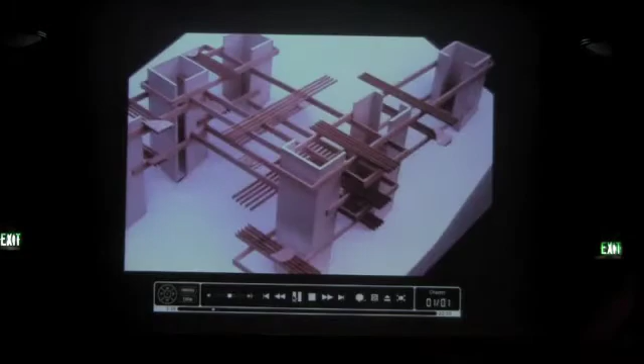Actually, I purchased the site in the early 60s, about '63, and I was aware that it was on the springs, with a great amount of water flow. At the time, I was very much involved with developing a modular idea using core units connected with laminated beams. So I decided it would probably work here because I could touch down with a series of concrete tower units. That created a house of 4,000 square feet on a 600 square foot piece of land.

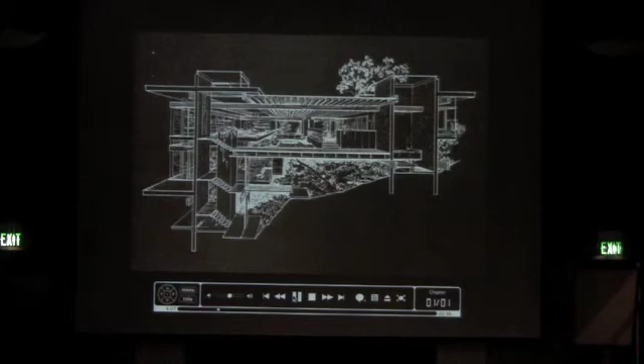I wanted to keep the house parallel to the street because that's the way the neighborhood developed. My lot was a transition lot between a flat level above and a flat level below, and the land was actually coming at 45 degrees to the house. So I ended up with a large number of levels, about 7 levels in the house.

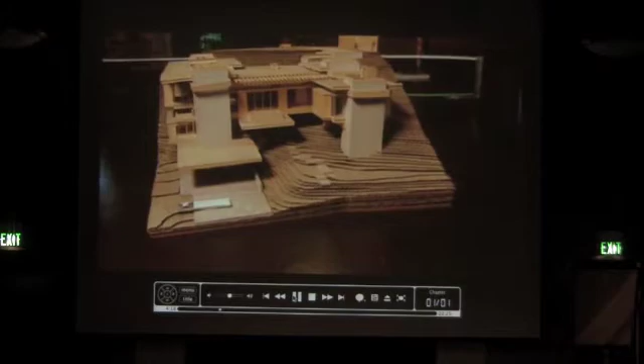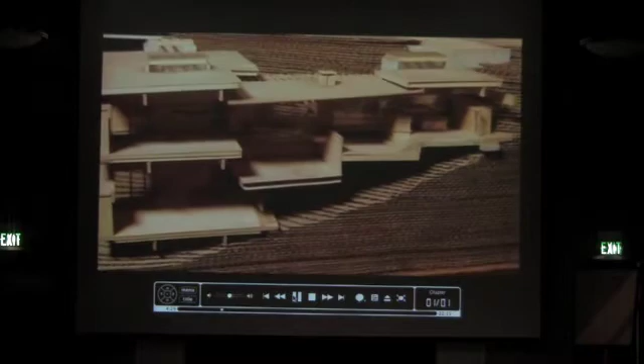If we take it apart, we can see the section. You can see the studio where we're standing now, lower living room, dining room, kitchen, upper living room. Plan-wise, the whole thing was rather simple. I thought of this whole area as a family space, from the kitchen to the studio. In this case, I have eye contact from the highest point in the house to the lowest point.

There were 6 towers that held up the house. We can see one over there that contains a stairway. Three of them contain bathrooms.

And the kitchen, I use it as a nook area, and the master bedroom has a fireplace. Each of these had their purpose as well as support, and they were 8 by 12 dimensions that could accommodate most activities of bathrooms, stairways, kitchens, and so forth.

The rest of the house bridges between these concrete columns. All the tower units are skylit, as we see here. At the same time, because I have a clerestory between those two rooms, I get light into the kitchen space as well as into the bathroom.

And there's usually a line, as you look around here, carried through at the lower level to establish the point of door heights. And above that, there's always glass, and that glass then frees the upper roof.

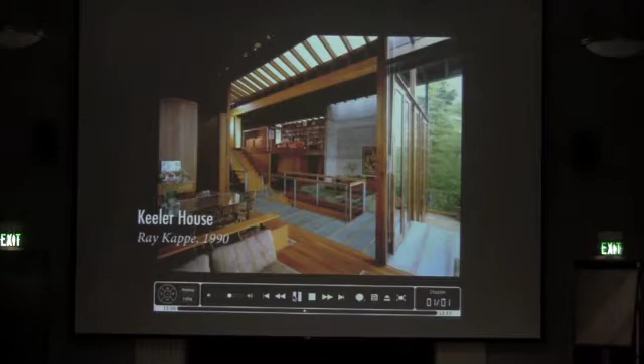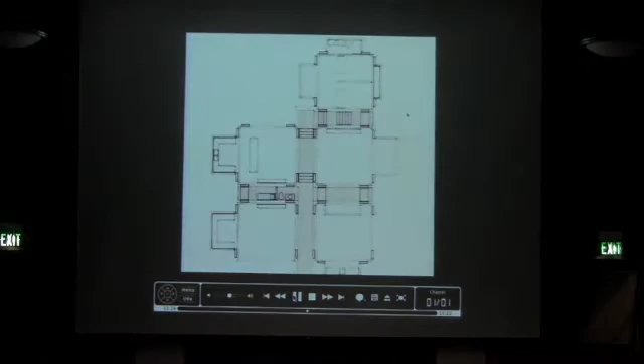As I started to talk to him, I discovered that in fact he'd been doing prefabricated architecture for decades. He'd actually worked on some designs for modular buildings, and he's been doing energy efficient design for decades.

So over there's some of the same Legos I had as a kid. I played with these and still do. This very much inspired my thinking about prefabrication, because Legos are a bunch of pre-created pieces, modules that you can combine to do different things. What we're trying to do with the homes is componentize, segmentize, create a consistent attachment system.

So they're absolutely analogies, but they aren't total analogies. Legos are pretty lightweight, these weigh 50,000 pounds, and those snap together, these require welding. We don't do those colors, but yeah, we have others.

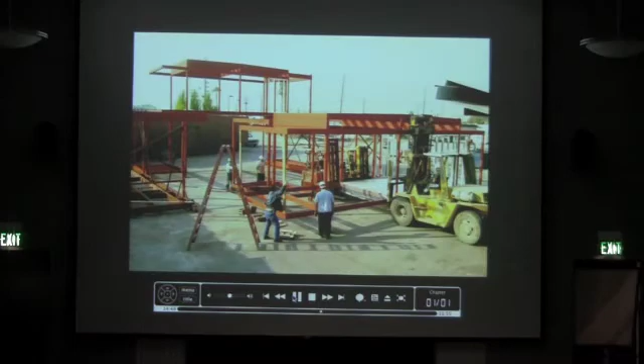So there's a difference between prefab and a site-built home. Site-built, you're going to do the foundation, then frame it, then put up the walls and do the electrical and plumbing and finish it out. Prefab, you're working on the foundation, and somewhere off-site, you're working on the house components. When you have the foundation, you can hopefully come to site and finish things out much quicker.

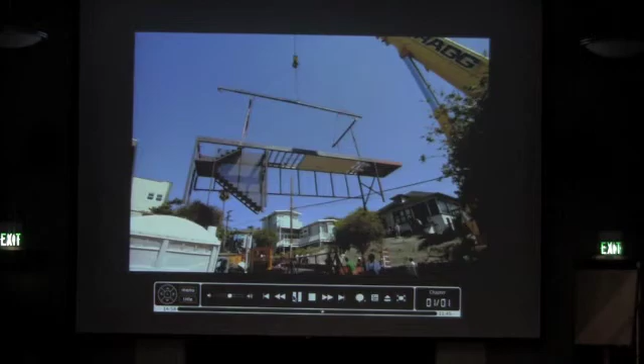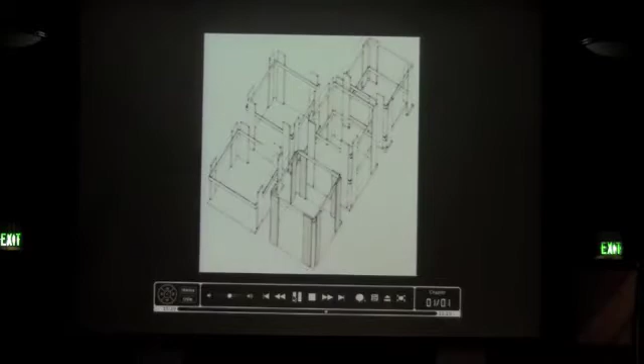I think most people think of a module as a box. When you open up a piece of the module, it takes away from the sense that you're in a box. And so when you're in this house, which was one of my greatest desires, was to make it a different kind of experience, or an experience that one might get from a custom house, rather than the feeling of being a series of closed elements.

We used a see-through fireplace so that the room above, which was meant to be more of a cozy sitting area, and the dining room, both could partake of the fireplace. It also gave the space a continuous flow. And at this point, we're in the middle of the house, it just allows the whole space to really come alive. You get kind of the whole feeling that the house is really alive.

A clear requirement was this ability for the home to adapt to people's changing lifestyle needs in certain ways. So we came up with a few things that are important. One is movable walls. All the bedrooms have these walls that open and close. There's a sliding system, and there's also this accordion system.

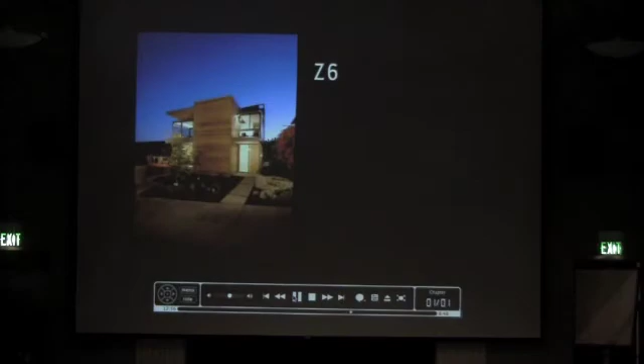We developed our own set of goals. We call them Z6. We're trying to make our homes as much as possible zero energy, zero water, zero emissions, zero carbon, zero waste, and zero ignorance.

So when we say zero energy, there are two parts to that problem. One, minimize energy demand, so make things as energy efficient as possible. And then two, supply what we need from renewable resources.

So number one, reducing demand. It's very tight and harder to do here because we do have a lot of glass. The glass we use is double pane and low-E. It's pretty energy efficient for glass.

We use polycarbonate, which has twice the thermal properties of double pane glass, so it's much more efficient as an insulator. It's really a plastic material of several layers - a layer of plastic, air - and that's why it becomes a more efficient piece of material. When it's built up, it's very strong, almost like a hard piece.

We use a very high R factor, which is a level of insulation in the walls. And by the way, it's made of denim, blue jeans.

All of the downlights are LEDs. LEDs use a tenth of the power of incandescent. Super energy and water efficient Bosch appliances.

Cork floors. Cork is a very fast growing material - you don't have to fell the tree to harvest it.

Very energy efficient radiant heating system, so it's hot water under the concrete and then the floor above, and that's preheated by solar tubes on the roof. That reduces demand, and then we have photovoltaics on the roof, which produce probably 80 to 85% of the electricity here.

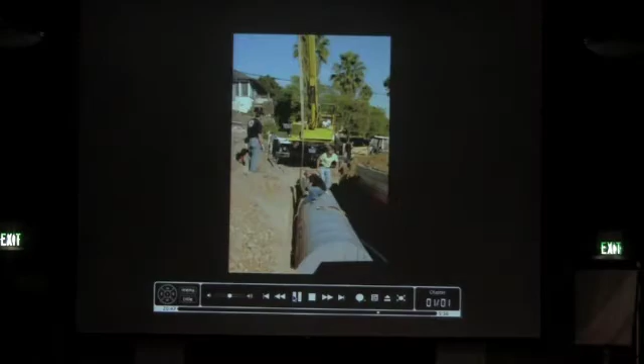Zero waste, sort of the same idea - how much waste is involved in creating, producing, transporting material. All the energy materials are recycled or reclaimed. Steel is the most recycled building material there is. Cedar, and the cedar outside, is what's called FSC certified, forest stewardship certified. The concrete here is mixed with fly ash, so it's a more recycled building material.

I, of course, drive the Prius, and the Prius has a great system that shows you in real time what your gas mileage is. Any Prius owner will tell you that at the beginning you just want to get as much as possible, because any system of feedback can be improved.

So we worked with a company to develop a system like that for homes. It shows you in real time how much electricity, water, and gas you're using, to inspire you and help you - whether or not you care - to be more responsible about your resource use in that home.

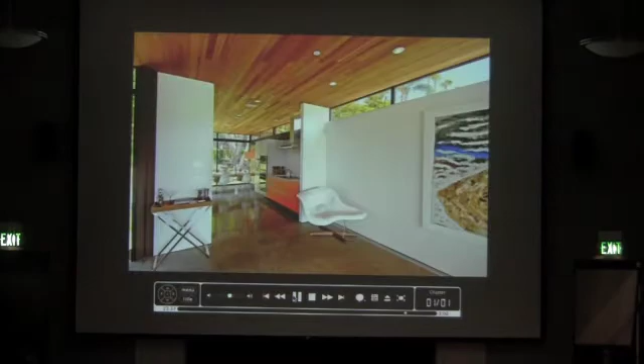At this point in time, we tried to standardize the modules more than we had in the first one. This is made out of only one type of module, and they're 12 feet wide, 12 feet high, but varying lengths—one module wide, 2, 3, 4 modules wide.

When modules are delivered, they're craned up into this base. They try to bring the modules as tight together as they can.

If you just look at this floor in a very simple way, what's demonstrated comes closer to the ideas of the case study period in the early 50s, where the goal of some, at least, Pierre Koenig was to get a high repetitive steel system that would work. This demonstrates a similar character and quality, but using modules instead of parts.

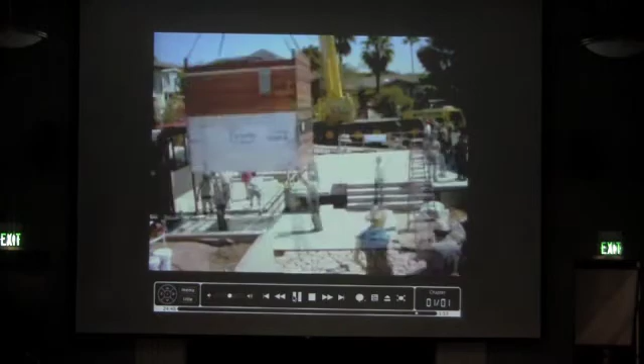What we're trying to do is get these so complete that once the 2-day installation takes place, there's very little time spent disturbing the neighborhood with construction, trucks, and all that kind of thing.

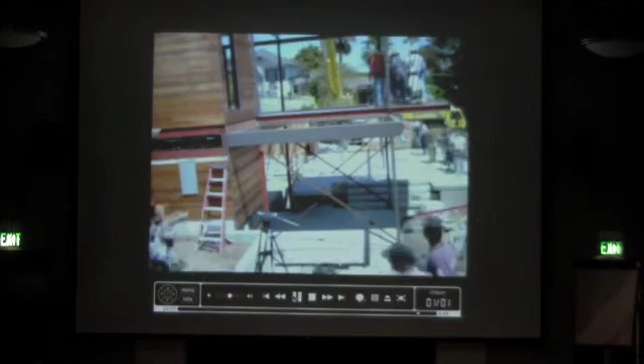The first one we did took 12 months—so permit to move-in took about a year later. Install took 8.5 hours, and it probably took 3 months or so to finish after install. The wired home took about 6 months from permit to mostly complete, so that's faster.

I think most people who want homes want nice homes. I think most people who want modern homes want nice homes. And I think many people who think of modern homes think that they're not nice. Ray is just one of the best that's ever been at creating more modern spaces.

See if this works right now. I cut her off too soon. Help. Wait, I see what happened. I get the PowerPoint thing—if we just let that go, that should run out. Well, I'll start over again. You said hit the... is this the film or the PowerPoint? There you go. Well, now let's start with one. Okay, and then probably get close to the mic. Yeah, I will.

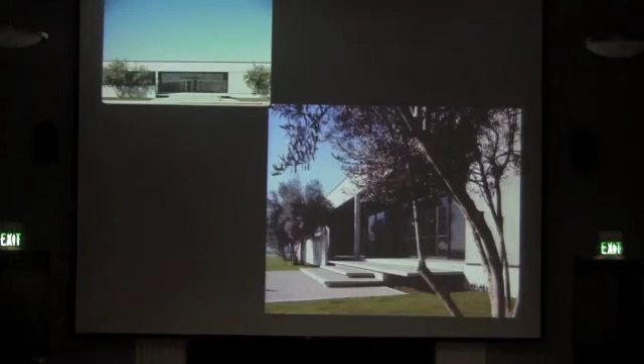Some of the early commercial work we did was like so. Industrial buildings were like this, all tilt-ups and precast concrete. I also did some developer apartments at that time—just to give you an idea, from 1964 to now, in those days these were built for $9 a square foot.

The industrial building that you saw just before was $4 a square foot. So the developers here said, well, we'll give you an extra 50 cents. You can get $9.50. You got a more difficult site, and maybe you can give us a more interesting building.

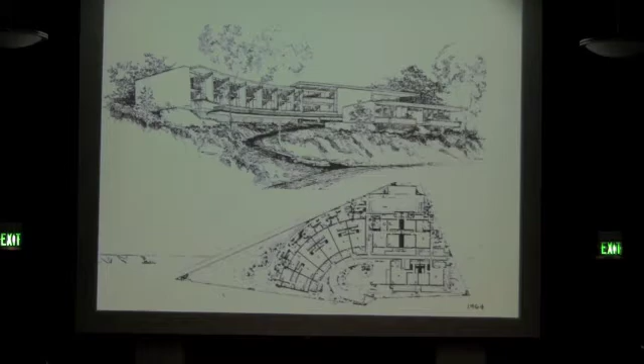And so in this case, the shape of the building really just follows the driveway that goes up there, and we had front and back patios and got quite a bit out of it, including a double height living room space, and quite a different building type than they did at that time, totally.

It was about this time, about 12 years into my practice, and I just finished this apartment building with about 24 units, and I was to have the opportunity to build on this next site, so I was thinking about how I would do it, because there were certain things I was dissatisfied with in the building process.

At the same time, we had done a land planning study for the city of Sierra Madre. My partners, my future partners and I at that time were doing advocacy work, and we had developed a publication on land planning in the hillside. Sierra Madre got word of it and wanted us to do this study for them.

In the process, they also asked us to make some models of how the houses would work on this hillside, different from the normal cut and pad. Most of the little houses that we did to show them in model were bridge houses, not so dissimilar from my own. That was the point in time when I began to think about modular housing.

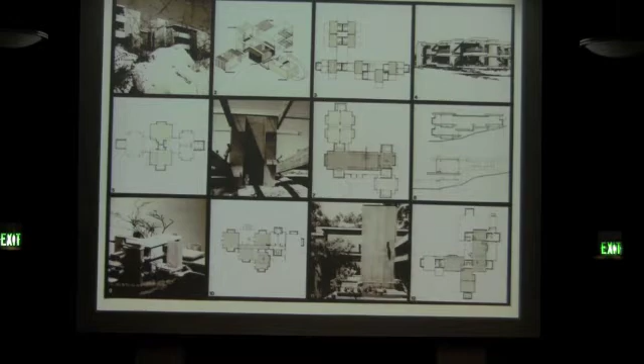And then this house is there, and then there was a 7,000 square foot house here. I'll just run through what those look like - there's maybe a better blow-up that you can see better of the modular system.

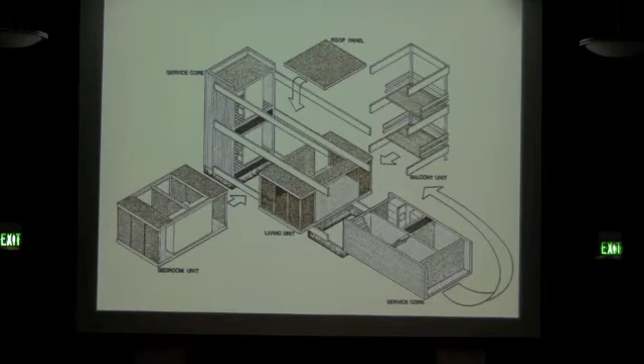One thing that, besides the system itself, is what I liked is that I could really maneuver around trees very well with it, and still I had a lot of bridging and long spans, so it worked well that way.

This little house was the first kind of prototype, and what was interesting here was that the owner bought all of the lumber from a restaurant that was being taken down, which had laminated beams and a bunch of 2x4s or 2x6s and so forth lumber. We incorporated all that lumber into this house, making it work with the same kind of my general system.

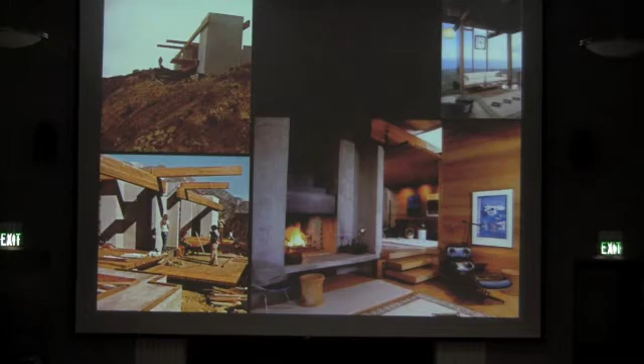This you've seen before is the support system for my house, and you saw enough of that in the film, but this was the larger house using the same system.

The nice part about these is that when the soil conditions were not good, I could concentrate these supports that take all the seismic and all the vertical loads, and also touch down on a very minimum area of the land. And you see the same kind of shadow play through the house, which I always find is pretty wonderful.

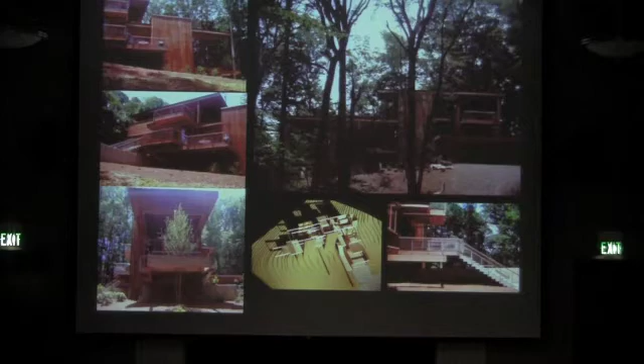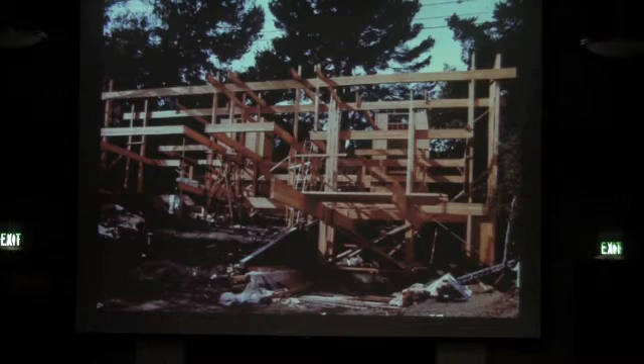In a later house, still using the same kind of system. One in North Carolina, still with the same system. I was always interested in construction process, construction systems, and structure. Some people don't really care much about structure anymore, but I still find it an important element in architecture. And the process by which a building is made, I think, is very important.

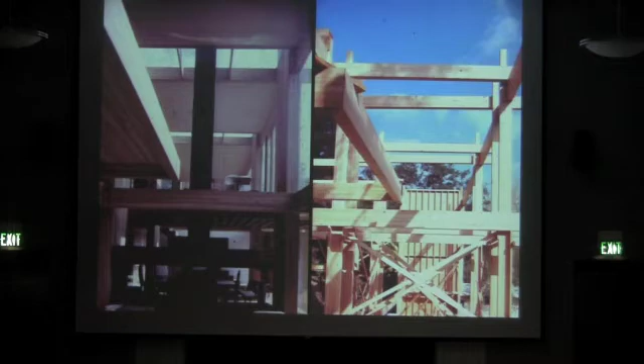I was one of the first people, I think, who incorporated in housing in LA the use of cranes. It's fairly typical in Europe, but it wasn't very typical here at all. This is a house that was a hybrid. All the beams, all laminated beams and laminated posts were pre-cut, pre-drilled, and this was erected in one day using cranes. So it was similar to a steel system in a way, where you can crane everything in, get it in place, then come back and infill later, tighten it up and so forth. Here you see the structure just on the right, and on the left you see it infilled with laminated ceilings and laminated floors as well.

Another system that I was interested in doing - we had this land up in Beverly Glen, and we had hoped to do a little planned community out of it, but they wouldn't let us do it, so we had to stay with these very tight, small sites. I used a repetitive system, three here, three there, and then added these components that could be used for both view, privacy, and sun insulation. I'll talk about sun insulation a little more later when I talk about energy issues.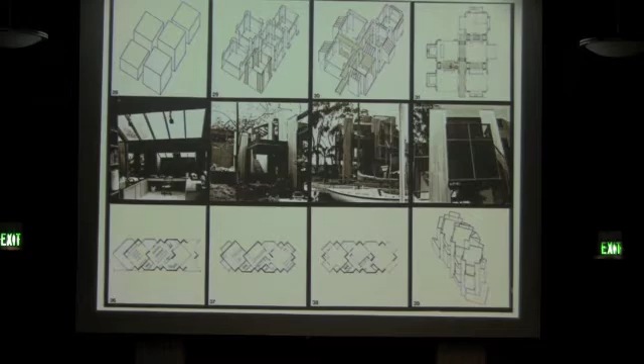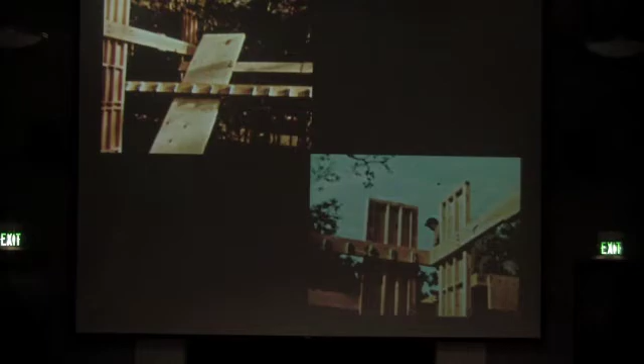So in this case, the carpenter built all of these panels, attached the beams and the joist hangers, and again we craned these up in a day, and then he infilled, and the house looked like so.

And the one at the beach, at the canals, looked like this. I want you to look at the way I used a sunscreen system forward and clear glass behind - we were trying to protect against heat gain in this case.

This was now in 1975. We're moving not too fast, but in 1975, California instituted its prescriptive code on energy - Title 24 is what it became. At that time, the prescription was that you could only have 20% floor area, glass area to floor area ratio. Most of my houses were more like 40, 60, so they weren't even near what the prescriptive code stated.

But I wasn't satisfied with that, because I didn't really want to change my design attitude if I didn't really have to. I'm one of these people who's sort of an empiricist - I really want to test things and find out how they really work. So I took 14 of my houses and 5 regular houses that would follow the prescriptive standard and compared them, using a whole series of evaluations, trying to determine what was really the reason that some were more effective than others. And I found that all of my houses were more energy efficient than those other 5 houses, which sort of surprised me.

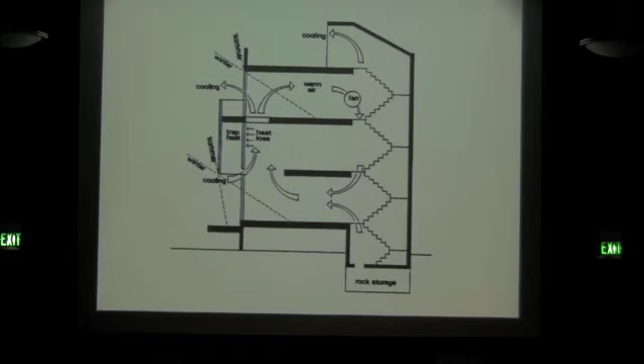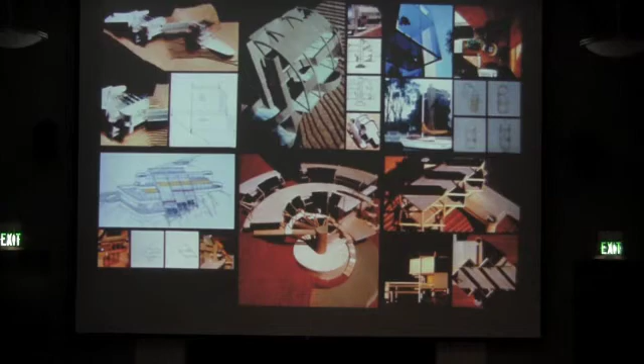So there were a lot of elements that I then began to think about as I went through the next period of my life, in which I thought about how I could make houses more energy efficient. What were systems I could use, both active and passive, and so forth.

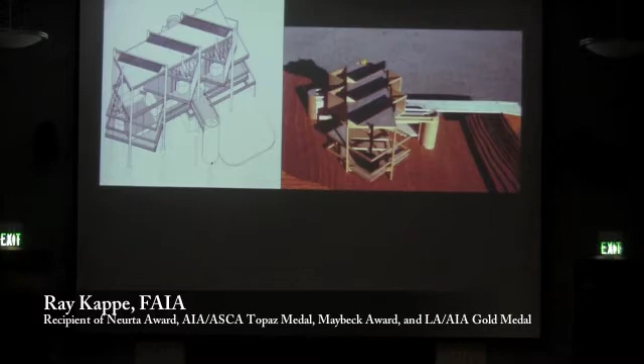So here's a series of houses that I worked on, and here you see again it's the 45-degree turn in order for the solar collectors to get to the sun. There's a series of greenhouse elements that are out front. It's hard, just a minute.

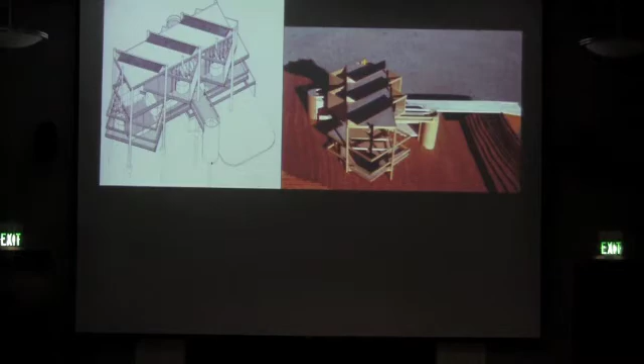It's hard for me to really see it adequately from here. Anyway, in each of those little greenhouse elements there was a process where they could be closed off. To get the mass, I used a water-filled fireplace unit, since the owner wanted fireplaces in each of the rooms. By adding water you get the mass. I'm not on grade, so I didn't have concrete or any of the material that would give me the mass. That was the thinking behind this particular house.

In this case, this was near Malibu. It's a big rock, and the site was a rocky hillside. This is all rock. So I thought about developing a greenhouse that would cover that whole area, with solar collectors at the top.

What happens here is during the day - I don't know how much you know about energy of this type, maybe you know a lot by this time - it takes about 8 hours for the heat to build up and then go back. You can use it to help heat the house. So the idea was during the day you open this up, at night you close it, then you open your sliding doors along the corridor and let that heat come in the evening. That was the strategy used there.

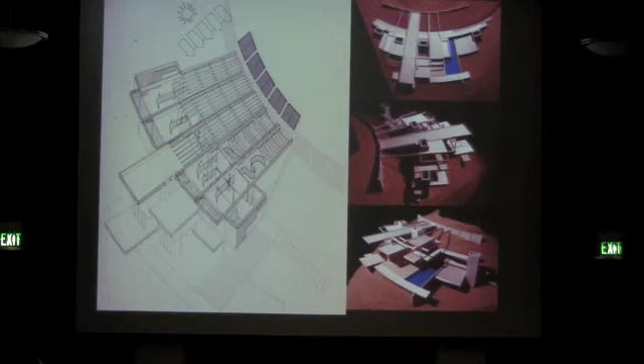In this house, again I wanted to use a monitoring system of solar collectors. This is an interesting project because the owner wanted it to be almost like two houses - this as their main house, and also a secondary unit up at the top, with a stairway to each. In this case it's a steel pile support system with laminated beams on each side.

The idea was, and you can see it better here, the solar collectors would take their heat to this central piece in the pool area. This would have a fan coil system that would take the heat back to the house in a forced air system. It could also be a radiant system, dealt with differently. And of course, if the house wasn't heated, all that solar could go into the pool for pool heating.

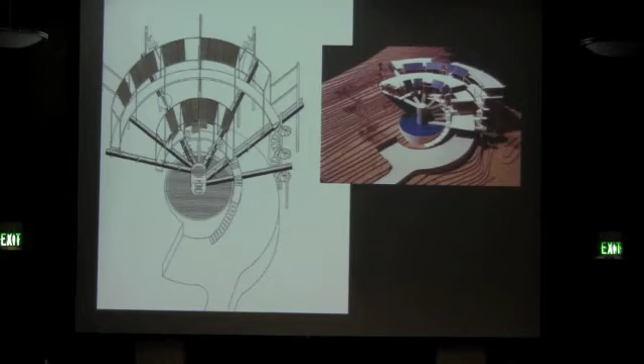This was a 45-degree slope. The strategy on this one, besides developing the trussing and structural system that held it up, was to also have a greenhouse element with water-filled containers at the bottom for mass. Again, at the end of the day you let that go up into the house. The part based in concrete at the back was also mass that could generate heat.

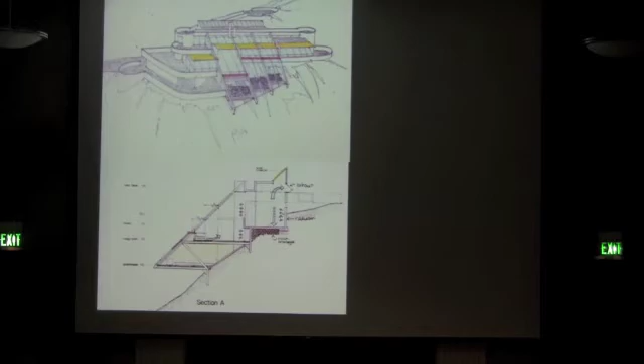There was a possibility to get rid of overheating through a cooling system, with a solar collector along the back - that was its system. And this one, again, is on a site that spanned a little gully, and these were rotated in order to get the solar collection.

The solar panels here were facing west. The north side would let light in from the north as well. And in the west, sun was heat-trapped and then let into the room later on.

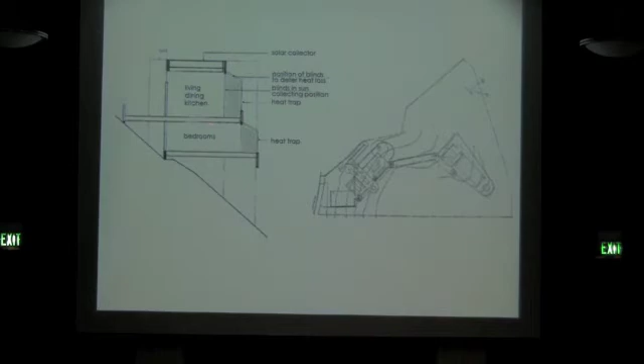And this is a concrete block house. In this case, the wall, this center wall, is east-west, goes east to west. The object here was to have a series of solar panels along here.

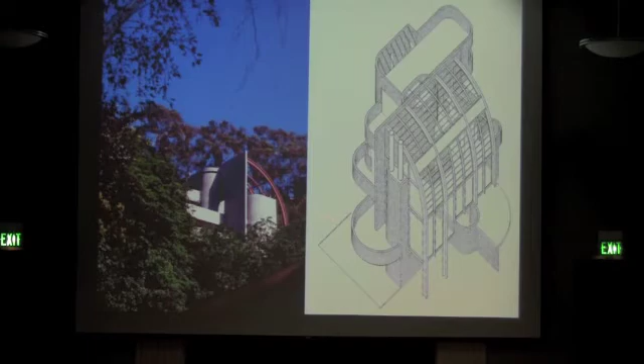There was a roll-up, roll-down shade. This would roll up, this would roll down, and that way you could control the amount of sun coming in. Then you'd heat the concrete block wall, and that would feed back 8 hours later. Here you see those

screens here, the solar panels exposed here. The system, one of these takes the heat from the top back down to a rock storage like I expressed in that other shot, and this is the feed that feeds the heating system.

Used, because it's a pretty vertical house, we used glass treads to take the light down through the house totally.

One at the beach, and in this, well, I'll go to the next one. In this case, this part of the house was rotated 15 degrees in order to have what originally was projected as a solar collector through the middle that would, at night, be able to be rotated into a closing position. The owners liked it without the solar collector, so I never got it in. And so even though we made these moves, it didn't eventually play.

The house was built with one portion concrete and the other portion a steel frame. And the concrete portion was supporting the pool at the roof.

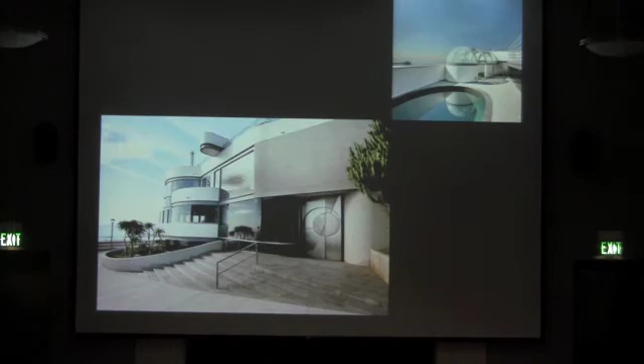Another one was designed as a solar collector all along this whole distance. A few, again, greenhouse areas for heating.

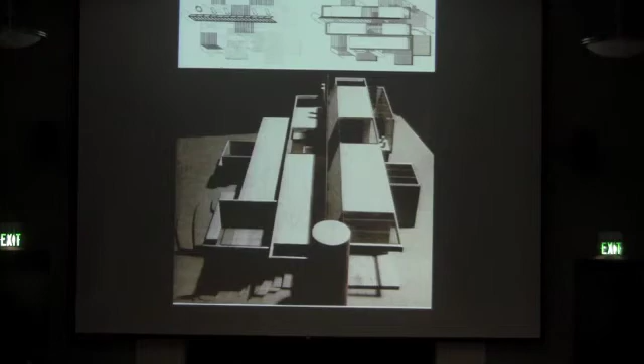This house didn't go ahead at that time. Later it was built like so, and by that time most people were no longer interested in my solar ideas because they weren't getting the rebate, and so this didn't occur.

Now, all of these houses could be talked about the same way as my house was talked about in the film, and I usually don't talk about those elements in the same way. I'm always more interested in the process and the construction methods than in that discussion, although they're all near and dear to me as far as all the things I was talking about earlier, shadows and so forth.

And finally, this house was a 15,000 square foot house that somebody came to me to do, and at the time he came, this guy had all the money in the world, and he liked that I gave him a presentation of my thinking process, and he wanted to incorporate as much as possible into this whole thing, and it was...

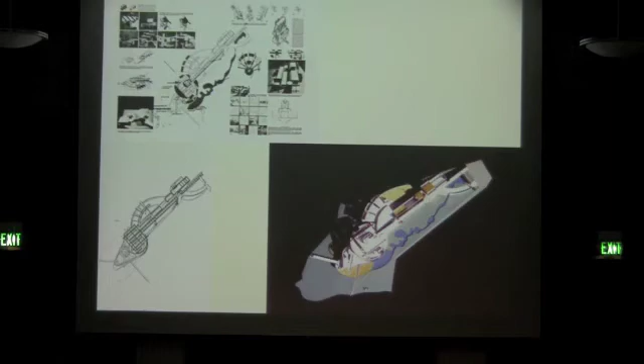I had to stay back 50 feet from the toe of the top of the slope going down to the water. So in order to see white water, I had this telescoping piece that would go out for people to walk out on. There was another one from the lower area where they could walk through this. So this had a lot of fun ideas, but the client ran out of money for some reason, and that was the end of the project.

Again, just to show that not everything is wood and not everything I've done is warm, this is a concrete and steel house. I usually work to solve the problem related to the particular situation and the client's wishes. In this case, there was an existing house with an existing concrete retaining wall. He enjoyed concrete and steel, so that's what I ended up doing for him. It's a combination of a steel rigid frame and a series of concrete walls.

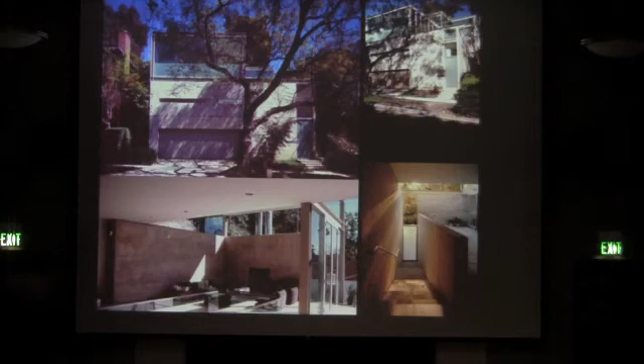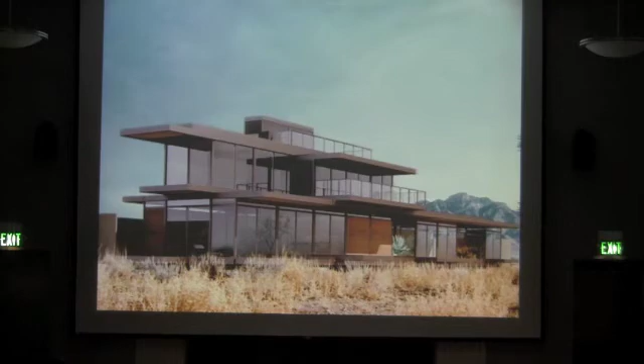These are just a couple more modular houses. This is one at the beach, one in the desert. Commercial building that we put up with modulars in Northern California.

There's a concrete house that I was doing for the Topanga area where there's fire potential, so it's an all-concrete house.

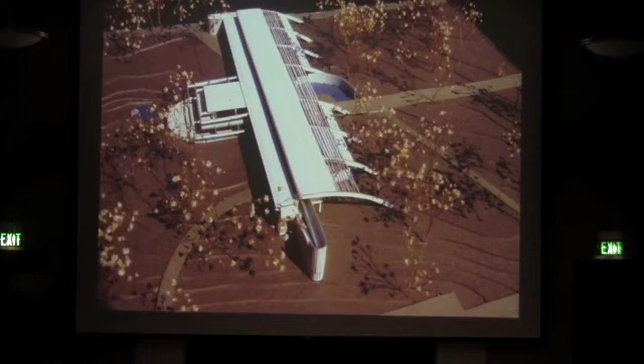And then a couple of larger projects: this faculty office building for San Bernardino State University. In this case, they have 80-mile-an-hour winds coming from this direction, so it was designed to take those winds over to the other side. I came here to work with Pierre Koenig on this because you guys had a wind machine here, and he said it works perfectly, so I was happy to hear that. We also incorporated some water for cooling because it's out in the valley type area.

Gymnasium for Loyola Marymount, a cable catenary structure. I worked with Goetz Schierle on this - I don't know if Gert's still here, I guess he is - in developing this. It was a 280-foot span, and this seemed to be the most economical way to do it.

In this case, I'm using a wind scoop at this point to bring in cool ocean breezes. That was one of the points to hold down the system on the other side. We had these handball courts to do that, and a large truss through this portion with airplane doors to open it up and cool it at halftime.

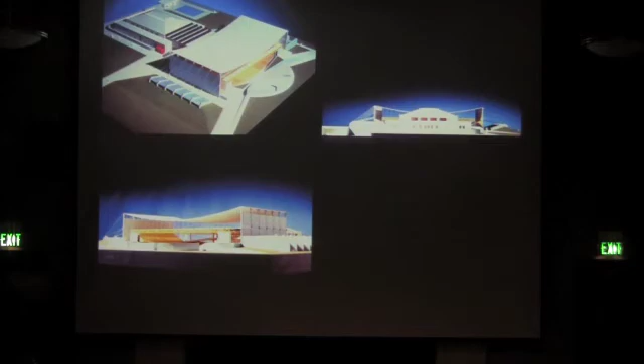Santa Monica Bus Administration Building. Again, the idea was to use these for air scoops - I'll show you the diagram in a minute. We tried to give it an analogy of bus ideas, the idea that it was a freeway building. These are panels on the west side for protection, with solar panels up above.

So as we look at it here, for daylighting, I used these horizontal panels that would bring daylighting in from the south side. I also had north daylighting. The panels were established for seating view and standing view. The air scooping went from this point to the plenum so you could control the way air came into the building - solar collectors over an outdoor patio, and these areas of sun control.

And at night, we actually wanted the last sun to come into this area because these people, the bus guys, used this at night - I guess they had pool tables and various kinds of activity up there. So it was kind of a 24-hour building that we did.

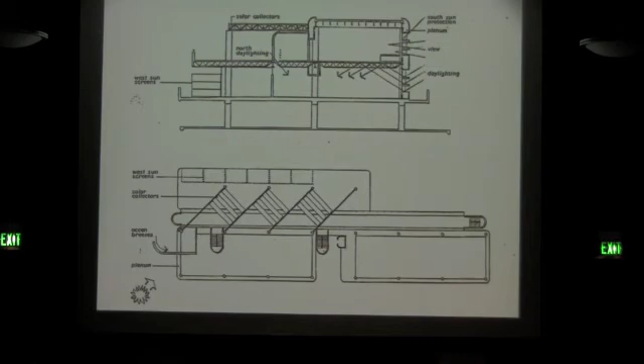Well, the reason we had that building, and I'm just about through now, was that in the early 60s, when Calvin Hamilton became the planning director for the city of Los Angeles, I was asked to do a transportation study and a communication study for the city of LA. At that time, the LA freeway system was supposed to be on a 4-mile grid in both directions.

Along with other things, I thought this seemed to be a good sort of quadrant for planning and development, because we were trying to determine whether it should be centers or corridors or what it should be. In this case, 4 miles square is about like the city of Santa Monica, which I think is a good city. These would then break down into 1-mile quads, and in that you would have your elementary school, your low-rise buildings, your single-family homes towards the freeway.

Then in each case you would have your more dense housing, and then at the hubs you would have the most dense, depending upon what these neighborhoods had, where the high schools happened. If they had high schools, fine. If they needed new ones with development, they would be in these areas.

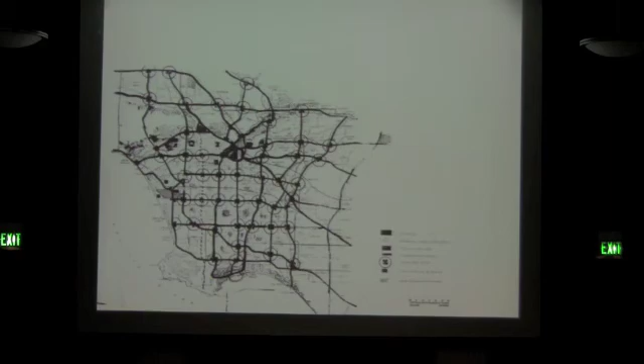Anyway, the idea was to think about the freeway, not fixed rail, as a system for developing LA. And then instead of the fixed rail, I designed these individual transit units, because I always felt that LA's fixed rail would never really work in the long run, and that we could have little electric cars that were more like 3 feet wide by 8 feet, about a quarter of the size of a regular car.

They would be 1 passenger wide with a secondary passenger in the back. With these kinds of vehicles running through the neighborhood, you could then only have access roads that would be just 1 lane wide, or a parking lane wide, about 6 feet, and you'd have all this land left for children's play and other things. These vehicles could be taken onto the freeway.

Some variations on this. The idea was to be computer controlled, electric. They'd drive eventually by themselves. Okay, so this is the 1960s.

Of course, that wasn't adopted in any way. But if you really look down the line, and I won't be around, but I imagine with all what's going on, you hear about these smart cars that can drive by themselves, which they're working on. They've been working on them forever. When I went to the World's Fair as a 12-year-old in 1939, GM already had systems in their exhibit in which they could radar control cars. So a lot of this doesn't happen for various reasons, political and otherwise, and economic.

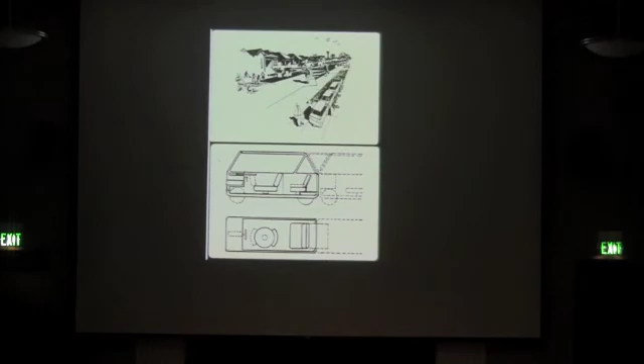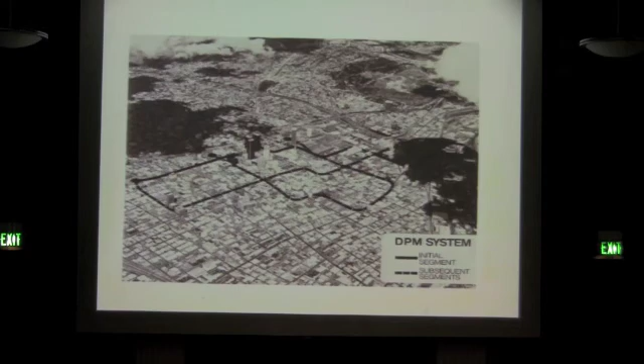And I had a whole series of planning attitudes with that. Our firm also did the downtown people mover system, which was a fixed rail, because that's what they finally determined they were going to do. This was the routing of that system, which is about the same as the subway system that's there now. We had these intercepts where the cars would park, and you'd either pick up the fixed rail or a bus or whatever vehicle. We were keeping the cars out of the city.

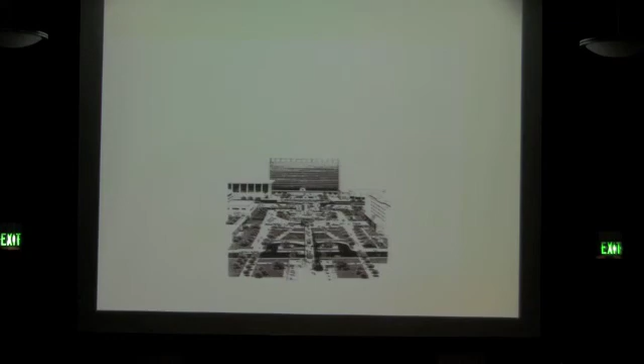These were some drawings of what it would look like in the city at Arco Towers and at City Hall. At this point you see bridging from City Hall into what is now Grand Park. In the 60s we had projected this for the city, which was really Grand Park, in which from the music center there was a bridge over into this area. This was a high-intensity use area for entertainment and so forth too, which I think they're thinking of doing as well. So quite often it takes 40, 50 years before anything happens that you sometimes think of earlier.

And finally, we did have the opportunity to do a small new town outside of Los Angeles. At that time, of course, around London in Britain there were a lot of new towns being developed, and also in Sweden, Finland, and so forth. Megastructure was not uncommon. So this was a projection that we made for this town outside of LA.

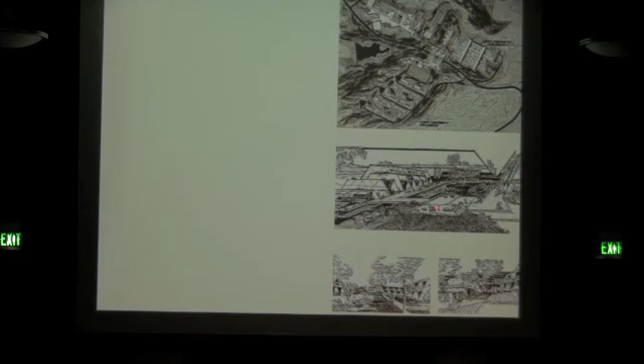The intense, heavier, multiple dwellings were up in this area. This was a lower density area. This was the center of the whole process. We had our own reservoir, and these were some drawings that I made to show what it might look like. It was a prefabricated triangular panel that we were going to use, and so forth. So, thank you for your patience, and that sort of ends 60 years of Ray Kappe.

And if anybody has any questions.

Well, where does that stuff disappear to then? Where does it disappear to? Well, I don't know. Another thing I was going to say earlier, when we did that first prefab, that was the first platinum house in the country. That was only 6 years ago.

Today, there's hardly a project that's done, whether private or public, that isn't getting some LEED rating, whether silver, gold, or platinum. I think architects have always wanted to engage that process. What we found, like when I was doing it in the 70s, it was difficult to get clients to go along with all of that, because each of those items does have a price tag on it. I was trying to dual glaze all of those buildings instead of single glazing, so I was coming up with all these other systems. If they had a price tag of $50,000, the owner knew that. Today, most of us use dual glazing and other processes, and the owner doesn't realize it's part of their glazing bid, so they don't even think twice about the fact that that's a cost as well. But all I'm saying is I think everybody's working on a lot of this today.